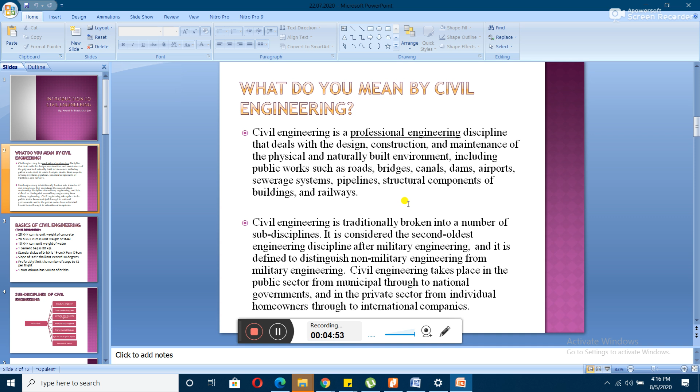Next, I mentioned a few things you have to remember. Tell me, what is the unit weight of concrete? I told you to remember these things. Unit weight of concrete is 25 kilonewton per meter cube.

Similarly, unit weight of steel - generally 78.5 kilonewton per cubic meter. And unit weight of water is 10 kilonewton per cubic meter. Those things I've told, right?

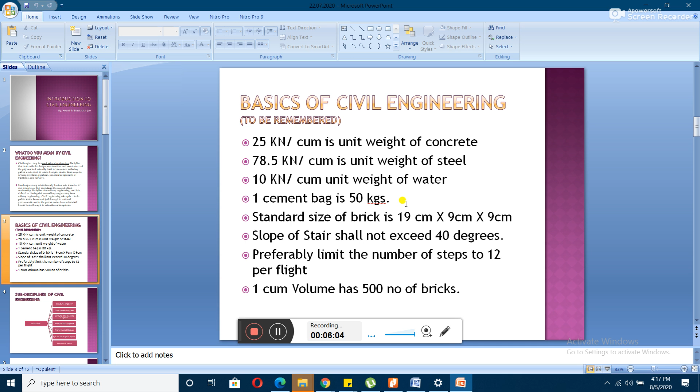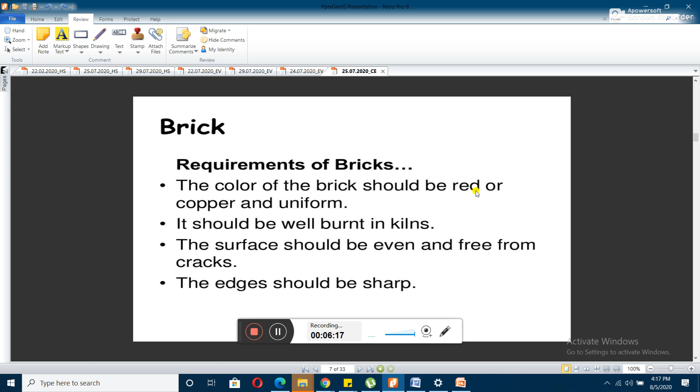Your one bag of cement is 50 kg. Your standard brick size is 19 into 9 into 9 centimeter. And that of traditional brick is 23 into 11.4 into 7.6. Generally nowadays we use modular brick only - traditional bricks are not used right now.

Where is traditional brick used, sir? There is no such convention - you can use it anywhere. Somewhere there may be a requirement that the structure should use this particular brick, but generally there is no such restriction - you can use any brick, traditional brick as well as modular brick.

You can use both of them. But generally, as the brick size is less, what happens in modular brick is your 19 by 9 by 9 unit, and also the breadth to width ratio is 1:1. Because of that, it provides better strength with respect to your traditional brick.

What is the width? In traditional brick the width is 11.4, right? And the depth of the brick is 7.6. Yes, sir.

Because of that, what happens is your width and depth, basically the cross section, is not uniform - one is having greater value than the other. Due to that there might be a problem in the placing of the bricks, as well as the strength of the brick is less compared to when the brick cross section is uniform, which will provide better strength to your structure.

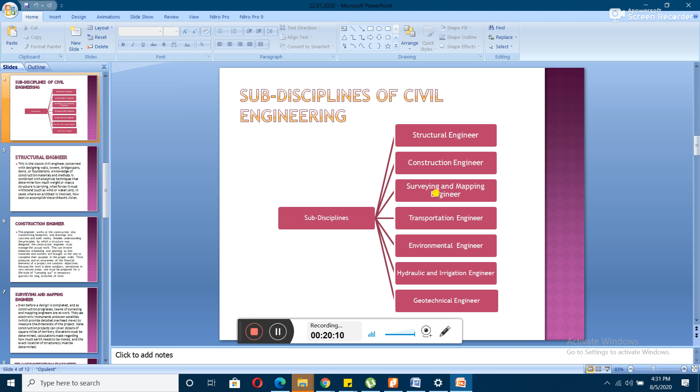Yes or no? Yes, sir. Yes, sir. Yes, this is the way your construction is to be executed.

Then we have studied building construction materials. What are they? Stone, brick, lime, cement, metal, timber, sand, aggregates, and mortar. These are the building construction materials.

The first thing is that all these materials need to be durable and should have proper strength. The aggregates and everything should be able to bear the strength. This is the primary objective of building construction materials: strength, durability, and it should not have any cracks on the surface.

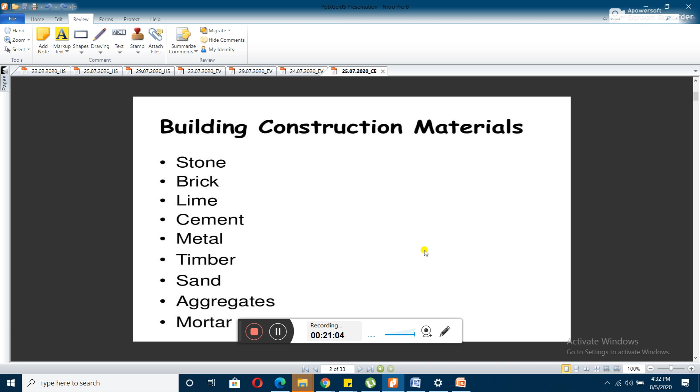Okay, yes or no? Yes, sir.

For brick and stone, we have already seen that they should not be of heavy weight, because the laborers need to place them one by one and carry them. If the stone and bricks are of huge size and mass, the laborers won't be able to carry and place them on one another. So those are the requirements.

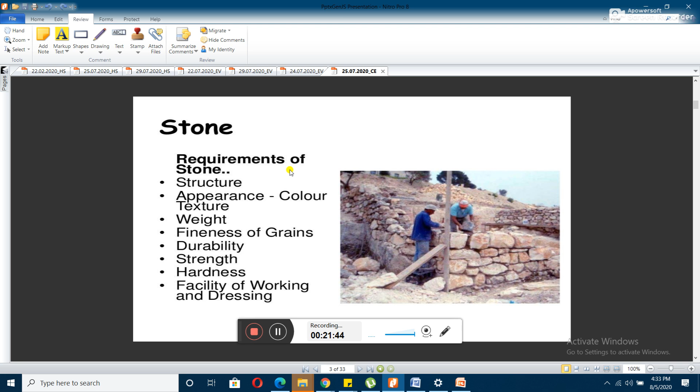What is the use of bricks? It is used in masonry, wall masonry construction. We have seen that walls are composed of bricks.

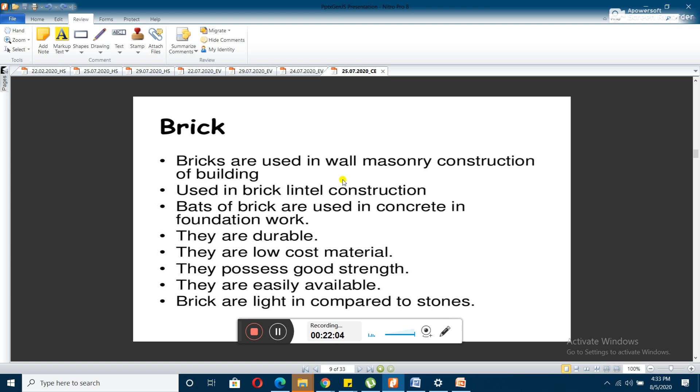Yes or no? Yes, yes, sir. Next we use lime. Yes, sir, yes.

Please repeat, what is masonry? For wall masonry construction, you have seen bricks used there. Masonry means the use of big size aggregates, like stone or bricks. So whenever you build a construction with those stones or bricks, that is known as masonry construction.

Next we have seen that lime is also used as a construction material, and the most important quality of lime is that it sets very quickly, which helps in the construction purpose.

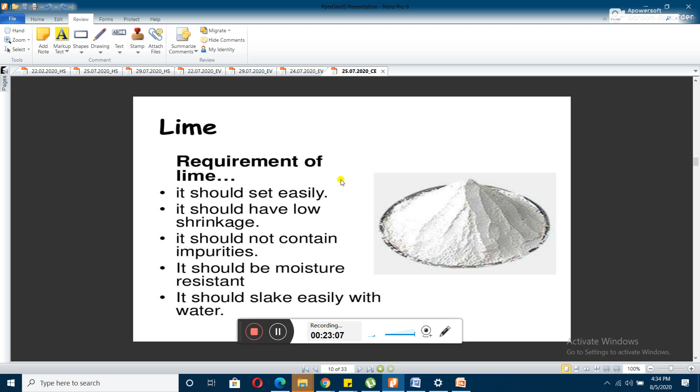Next is cement. Cement also sets quickly, but as compared to lime, it sets relatively slower.

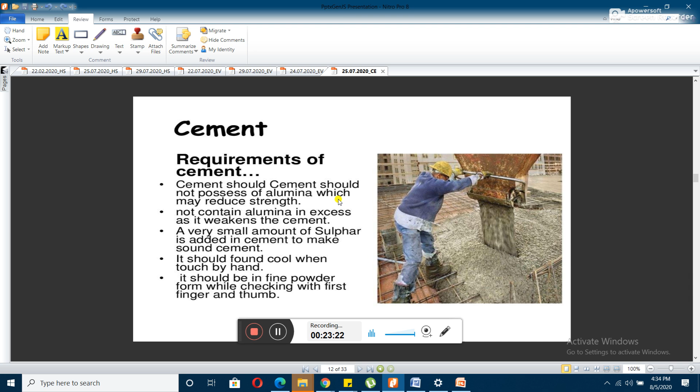There are types of cement: ordinary Portland cement, rapid hardening Portland cement, quick setting cement, Pozzolana Portland cement, etc. You will learn about the composition of most of these types of cement in your next semester in concrete technology.

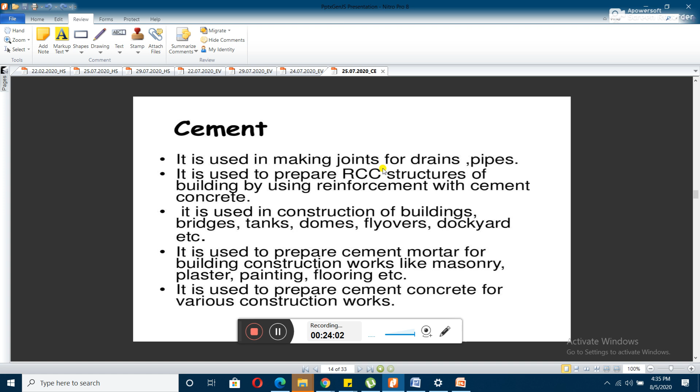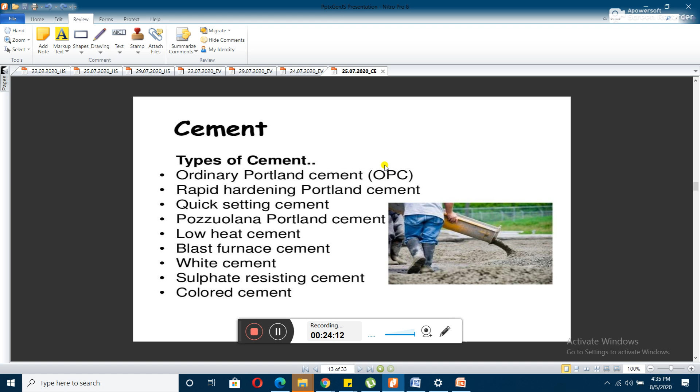Any question till now? No, sir. Okay, no sir.

Next, metal. We have seen there are two types of metals, ferrous and non-ferrous. Next comes timber, which is the wood-like structure used for building construction.

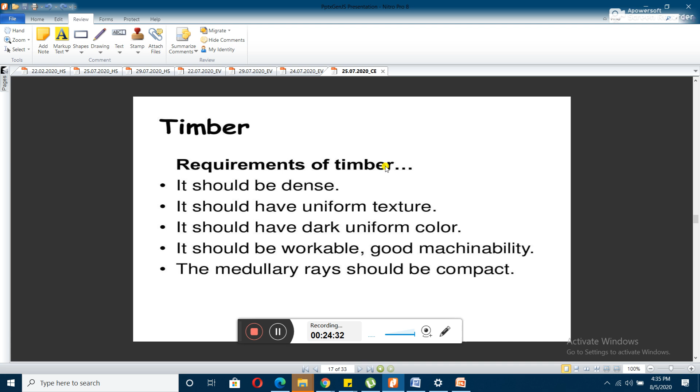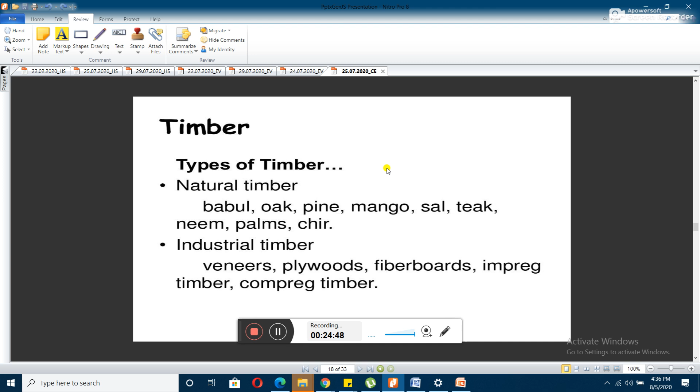The main property is that the medullary rays should be compact, dense and uniform. Unless these are fulfilled, a structure made up of timber won't have proper strength.

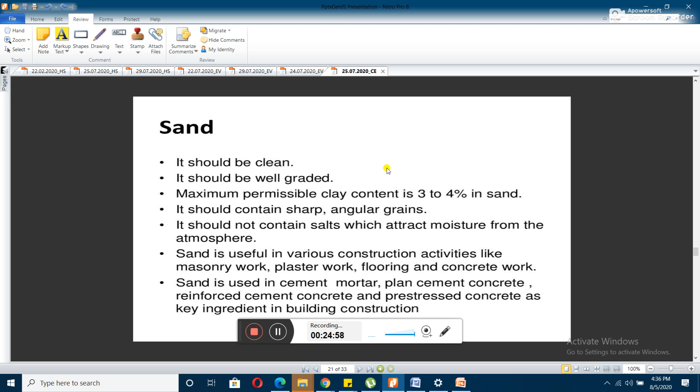Next, sand, which is treated as fine aggregate. Can anybody tell me the size difference between fine aggregate and coarse aggregate?

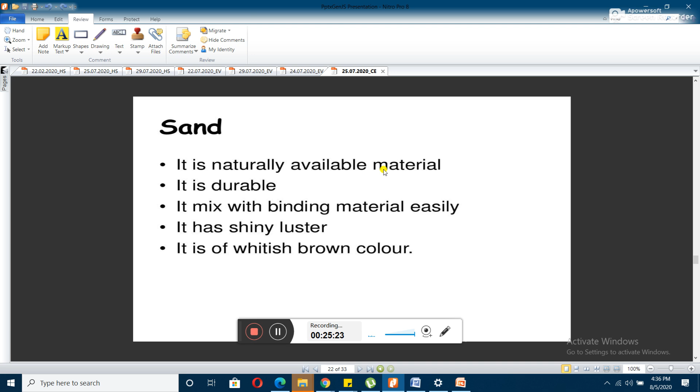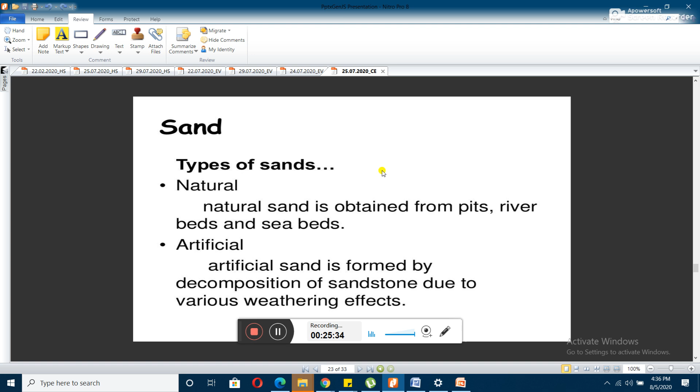Fine aggregate size is less than 4.75 mm, and coarse aggregate size is 80 mm to 4.75 mm. Below that, it is known as...

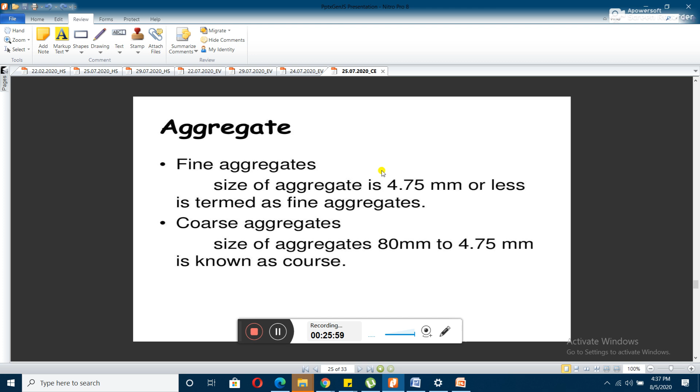That is fine aggregate, right? You have studied this already, all of you, I think. Any doubt arising in your mind, you can ask me.

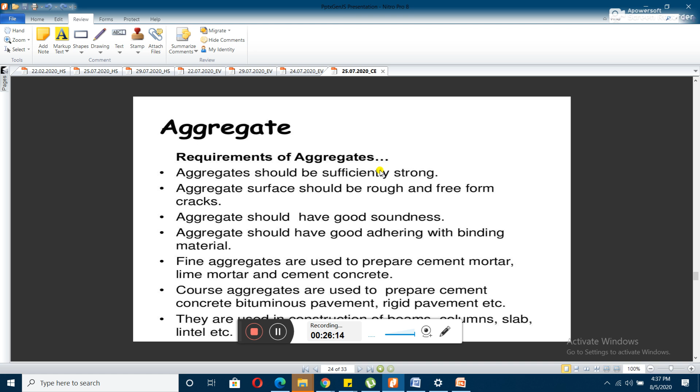Now tell me, what is the difference between a mortar and your concrete? What is the difference between those two?

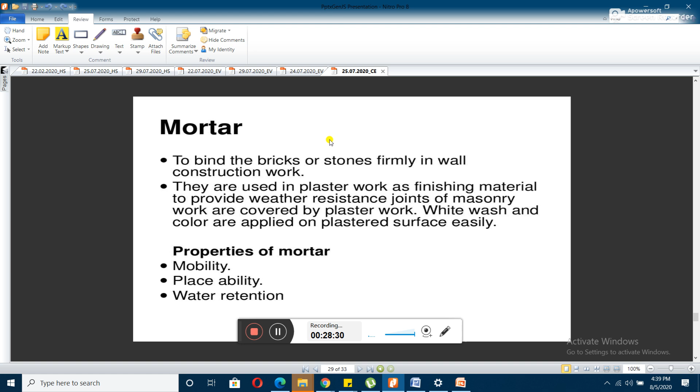It catches the paint - your brick won't be able to catch the paint that much, so above it we apply a layer of mortar. After that, we do the plastering and then the coloring, etc. That is the use of your mortar, right?

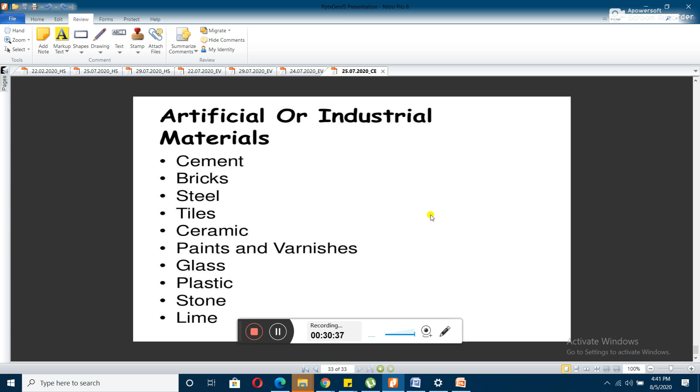Okay, and except this, does anybody have any doubt? No, sir. So nobody having any doubt, I guess. So let us conclude here today, right?